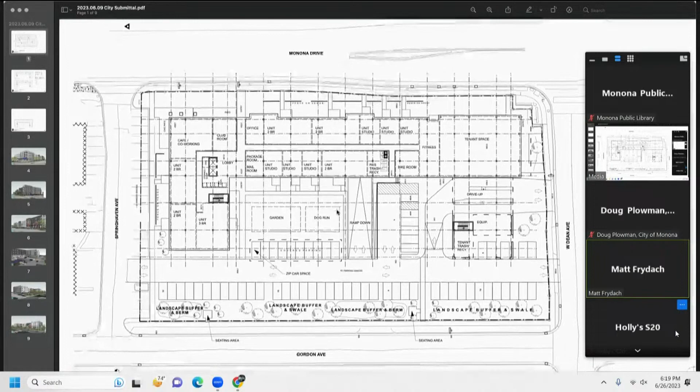Looking above at the upper level floors, it's a mix of similar size units and unit mix as the previous design, and it's the same kind of 4 stories that we had before. We are terracing back on that 4th floor on the Gordon Avenue side of the property.

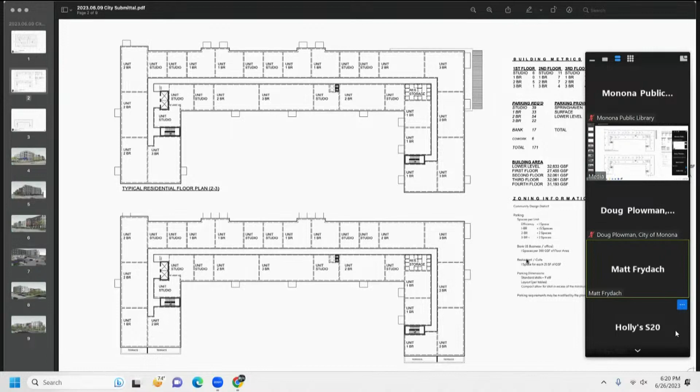The lower level again is all residential parking at this point, with access off of the internal drive lane.

Looking at some of the model views here, conceptual model views. This is looking from the southeast corner where you can see the BMO Harris space.

Basically what we're doing with the massing here, recognizing that this is a longer building now, being one larger building, is we're trying to break up the massing and the materiality to get some relief and break down the scale as much as we can.

A big driver in this was we had to get this building combined into a single building, for picking up some of the efficiencies of construction and costs associated with breaking the building and having lower levels run between them. So this is a little bit more efficient to build and to program.

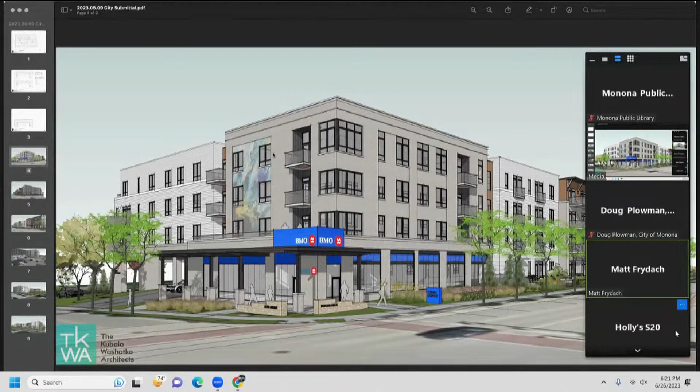So we've got masonry on the corner, anchoring the corner—you see that on both of the main corners—giving some relief with recessed balconies where we can. And then we're looking at the idea of opportunity for some public art elements to help further brand the development and also bring a little bit of art to the site.

Flipping around to the north side here, what you're seeing here would be that second retail space with the cafe co-working.

We're envisioning the parking along Springhaven would be focused on that retail parking, so it has easy access and visibility. And then we've got the patio space that can wrap around, again using that masonry on the corner.

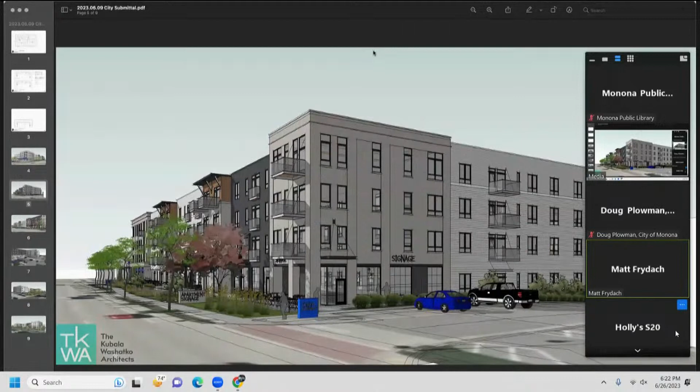And then as you look down Monona, you can see the relief—the bays, the projecting, the recessing—to again try to break down the massing of the building.

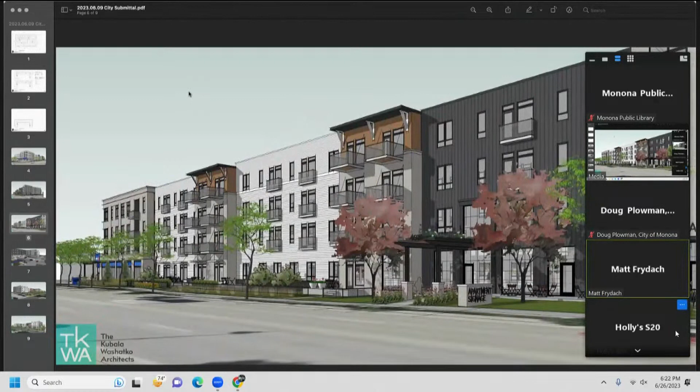A little bit closer view of the mid-block. So you've seen the apartment entry here, bringing that with a little bit larger scale entry element, a 2-story entry piece and a projected canopy that comes out. We're suggesting the idea of potentially some green roof elements on that canopy element.

The units that come down to grade with the site sloping—we're planning to utilize that to our advantage, giving those units a little bit of separation from the street and the sidewalk and having terraces or stoops that may be separated with either garden fences or hedges.

Basically with the setbacks, we've got a lot of room that we can do a good amount of landscaping. And the intent is to create some of those layers of separation and buffer for those residents that are on that street level.

Looking at the back side here, this is kind of the back entry for BMO. This is an important element for them and their use and functionality on the site. We've worked that through and coordinated with them as far as what they're looking for, for the most part—signage, general intent, and entry.

You're seeing here a suggestion of some covered parking with an opportunity for solar on those. That's kind of internal to the site, and it's also visible for people to see that there's solar on the building. And that's also where the Zipcar would be located, on the north end of that.

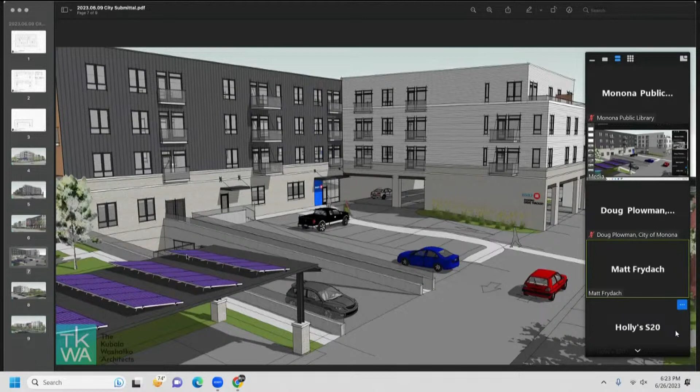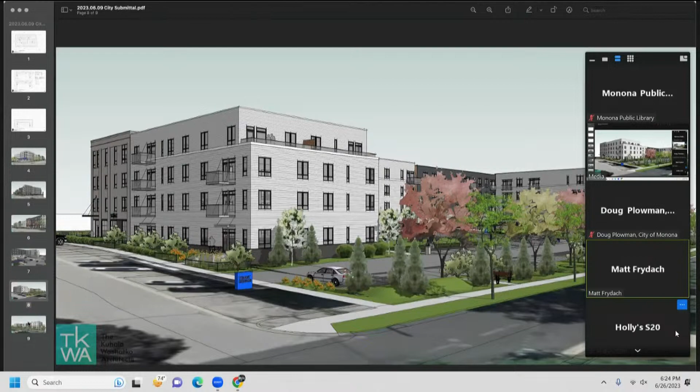And then one more view from the west side, more on the south side. Again, the bank drive-through area is down here. You can see the seating area, some of the vegetation, and the massing of the building, the material changes to again try to break down that scale and bring a little bit of visual interest to it.

Matt, anything else you want to add? No, that's great. Thanks, Matt.

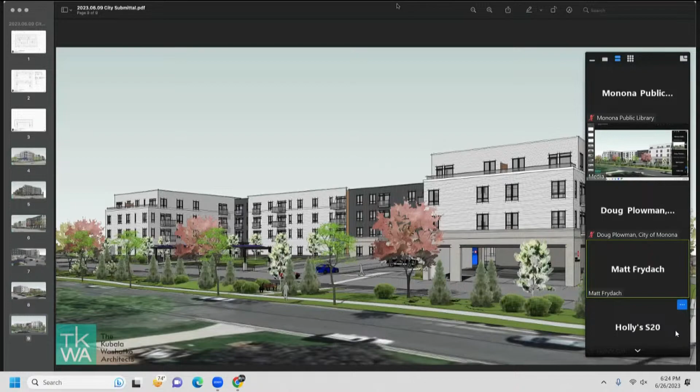Is there anyone else that would like to speak? Anyone else have from your crew that wants to say anything else about it before we close the public hearing?

No problem, I could probably say something. I'm Tyler Noel, president of Compass Properties, and this project unfortunately had to change, and it was a combination of poor design, but it also is historic times for interest rates, construction costs, inflation. So when we started this process, basically it was unbuildable. We were not able to move forward without making some changes. I wish we started off this way, and I apologize that we didn't take care of it quickly enough on it.

But Compass Properties is a family company, and we invest in communities. We're not developers that are just taking developer fees and moving on. And that's what sets us apart. So I just wanted to tell you about the macro world that I have to deal with, and where am I going to get the money? So I just wanted to say thank you for this opportunity.